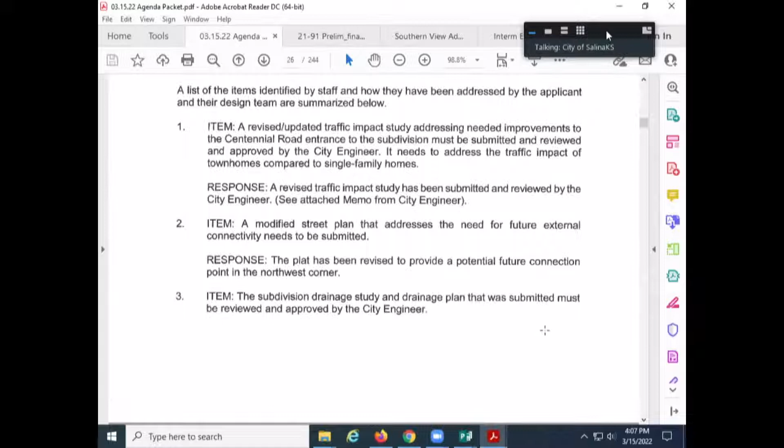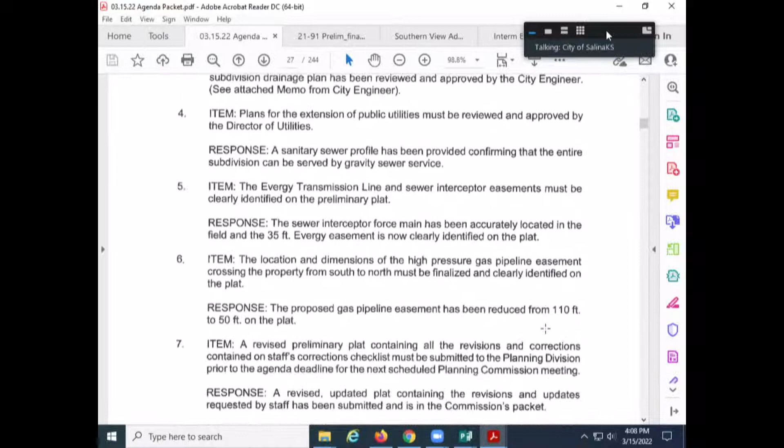We asked for and got a revision to the drainage study and drainage plan. An updated drainage study has been submitted, and the applicant's drainage plan has been reviewed and approved by the city engineer. There's a memo from the city engineer in your packet with the drainage study.

We wanted to make sure that plans for the extension of public utilities had been reviewed and approved by the Director of Utilities. The concern is that the sewer service for the entire subdivision is in the far southeast corner of the property, where Mr. Hers is showing his cursor. We wanted to confirm that the property could be served by gravity sewer service without the need for a pump station, and that has been confirmed.

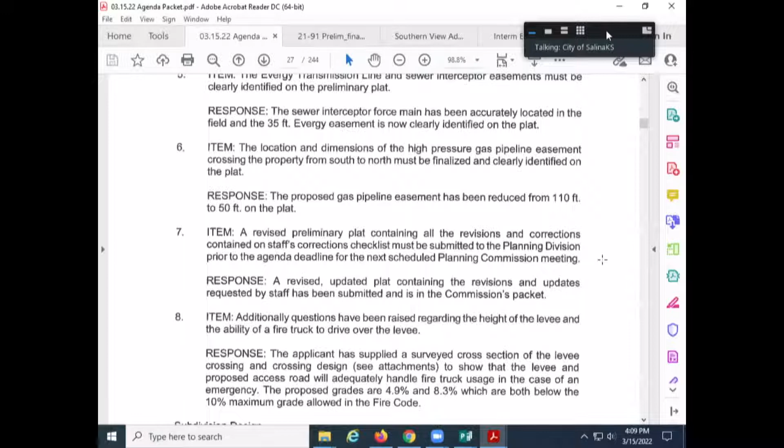We wanted to make sure the Evergy transmission line that crosses the property from south to north and the sewer interceptor easements were clearly identified, and we wanted the location and dimensions of the high-pressure gas line finalized. On the plat in your packet today, that gas line easement is 50 feet in width, located between Tim Rogers Lane and Amelia Lane, running south to north across the property. There's also a 50-foot easement for that pipeline in the Wheat Ridge Addition to the south.

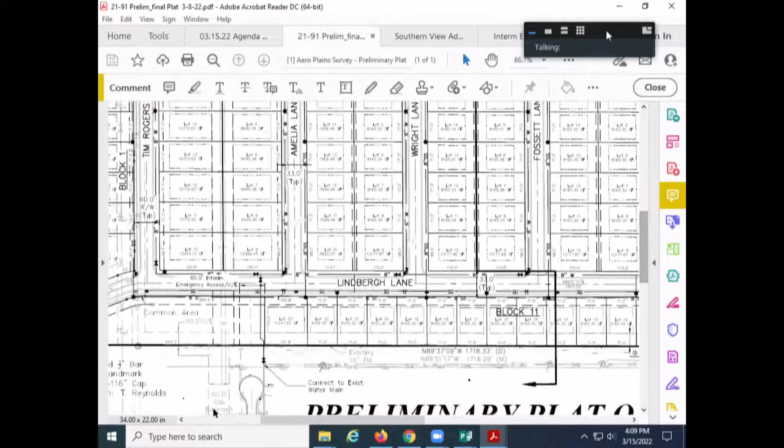We also received a revised drawing that had all of the labeling, lot and block numbering, and all the items we had requested.

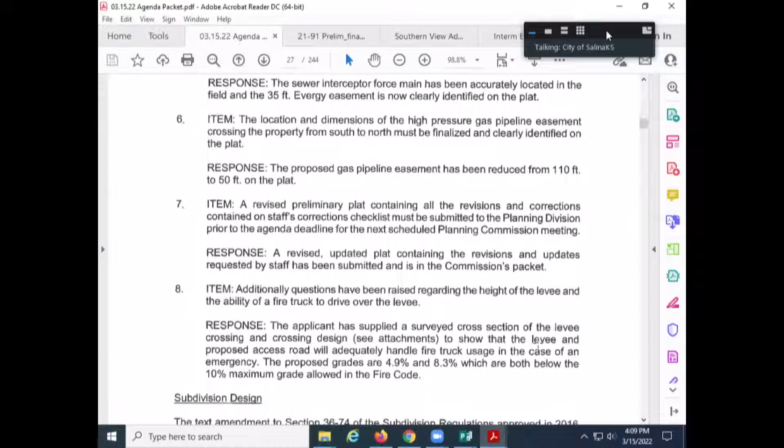Additionally, at the March 1st meeting, there was a question raised regarding the actual height of the levee and the ability of a fire truck to drive over it. The applicant has supplied a surveyed cross-section of the levee and a crossing design to show that the levee and proposed access road will adequately handle fire truck usage in an emergency. That has been included in your packet.

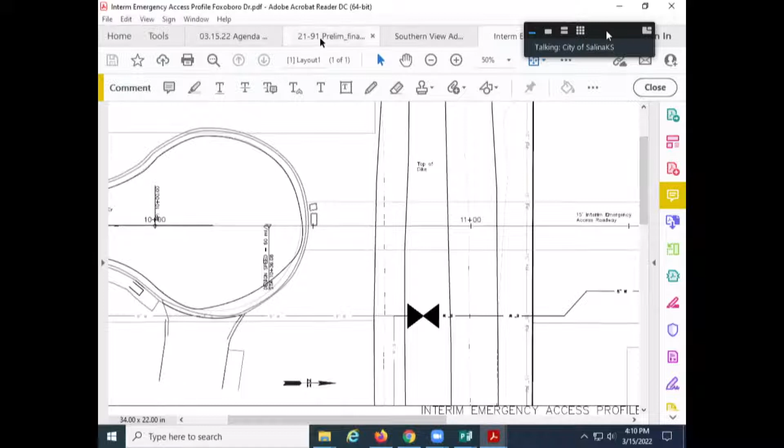The subdivision regulations, as amended in 2016, require that all new subdivisions have at least one public street access point onto what's referred to as a direct access perimeter street. In this case, Centennial Road is that direct access perimeter street, and there will be a direct street connection from this subdivision to Centennial Road.

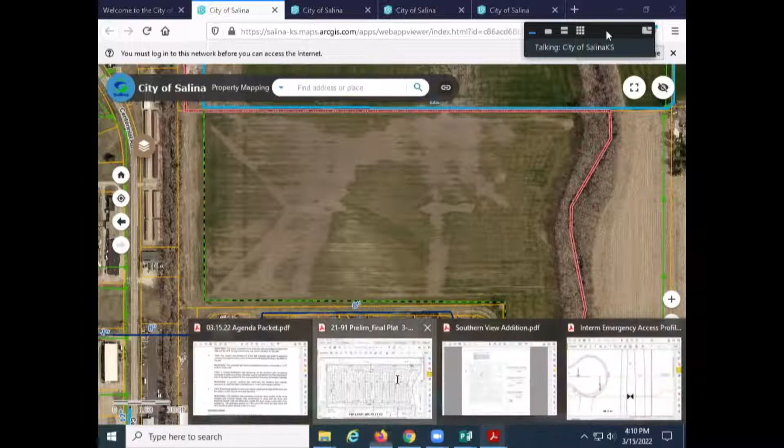It also advises that the new subdivision shall have any additional means of access in and out, either by direct street connection or indirectly to streets and adjoining subdivisions, as necessary for the Planning Commission to assure safe and convenient movement of traffic within the subdivision and between adjoining subdivisions, safe and convenient movement of traffic to and from the subdivision, and access for fire and other public safety vehicles.

One of the challenges we started with is that this property is essentially landlocked, with no frontage on or access to a perimeter street. It's historically been cultivated farm ground. To address this, Storage Mart obtained the right of access across property owned by the Salina Airport Authority so they can directly access Centennial Road.

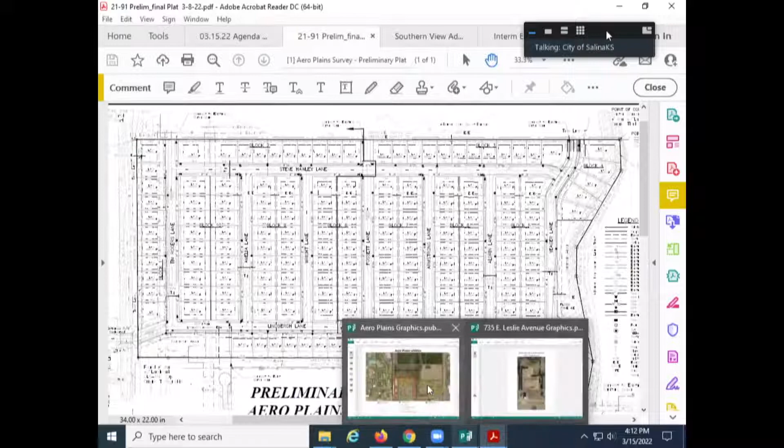To supplement that and provide a second means of emergency access as required by the fire code, they're proposing to construct an emergency access road from the north end of Foxborough Drive across the levee and into the subdivision. In addition, as you can see on the north, there will be platted street connections allowing for future connections either to an extension of Virginia Drive to the east or across the property to the north to Magnolia. There's a further option, shown on a map, that also shows potential to connect back to Centennial Road from the northwest corner.

The other thing we wanted to point out regarding the design challenges the applicants and their design team had to work around: you start with a property bordered by stream channels and a levee. You have an abandoned rail right-of-way occupying the west 100 feet, and because that was a rail right-of-way, you have an Evergy transmission line and a sewer interceptor line, plus a gas pipeline easement crossing the property from south to north, located in the rear of the lots between Amelia Lane and Tim Rogers Lane.

As far as the street access and particular design, Centennial Road is an arterial street. As constructed, it meets city street standards for width, pavement design, and curb and gutter. It currently carries, per the most recent count from 2020, 4,380 vehicles a day between Schilling and Magnolia.

There are 3 possible future street connections. One would be tying Tim Rogers Lane back to Centennial Road. A second would be Fossett Lane connecting to Magnolia, and then Yeager Lane going north and possibly east over to Virginia Drive. We have a plat design that allows for these extensions, but the timing of when those adjoining properties will develop is not within anyone's control.

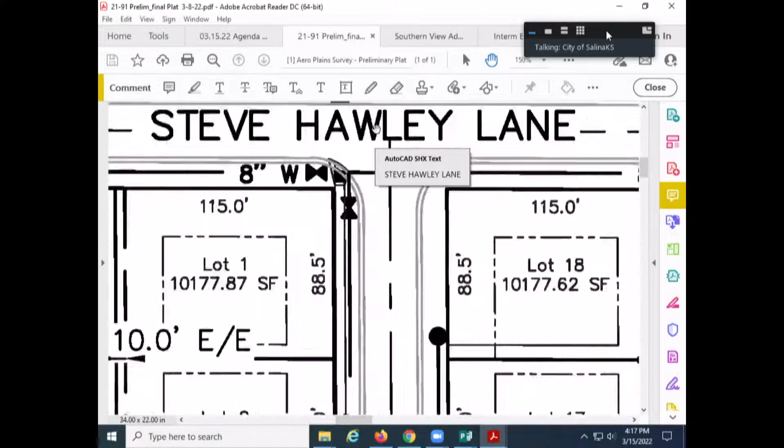We've highlighted the proposed street names on page 6 of your report. The original concept was to have Rogers Lane and Hawley Lane, and first names were added to avoid conflicting with existing Rogers Court and Holly Lane - even though spelled differently, if called in on 911 it would sound the same. So that's been changed to Steve Hawley Lane. As we've reviewed this, it may end up that Armstrong Lane would need to be changed too, to avoid 911 conflicts, because there's already an Armstrong Road in the county.

So we've looked at the layout. There are 169 lots divided amongst 11 individual blocks. There's a drainage easement detention area set up in the southeast corner to handle stormwater runoff, and there are 2 areas set aside as common open space.

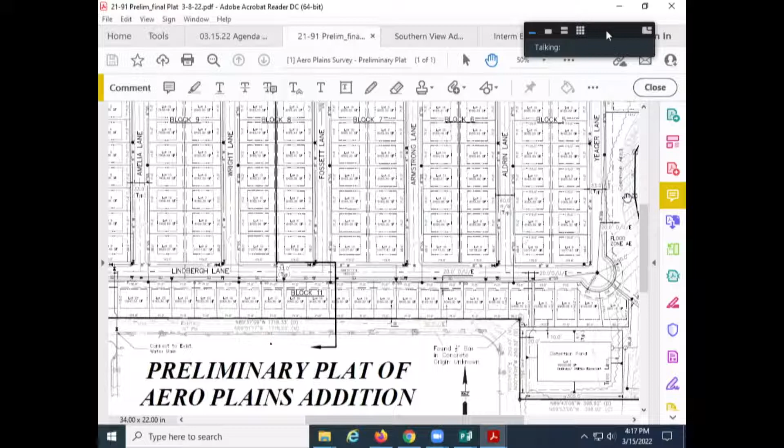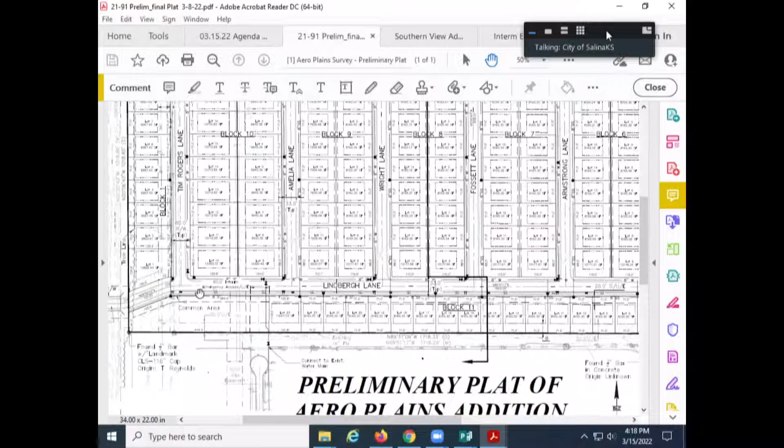So you have an open space over here, and the applicant can confirm that, but we believe the open space common area as you enter here would be an area for community mailboxes. Planning commissioners may or may not be aware that the U.S. Post Office has made a change to how they do mail delivery - they no longer let individual dwellings put mailboxes out at the street. They require in new subdivision developments that there be a compound with community mailboxes, and depending on the space, you can have 3 or 4 community mailboxes within a subdivision, or a community box for the entire development. The applicants will have to work that out with the post office, but conceptually this area might be a suitable spot for people entering the subdivision to stop and pick up mail. So they can confirm how they plan to use that.

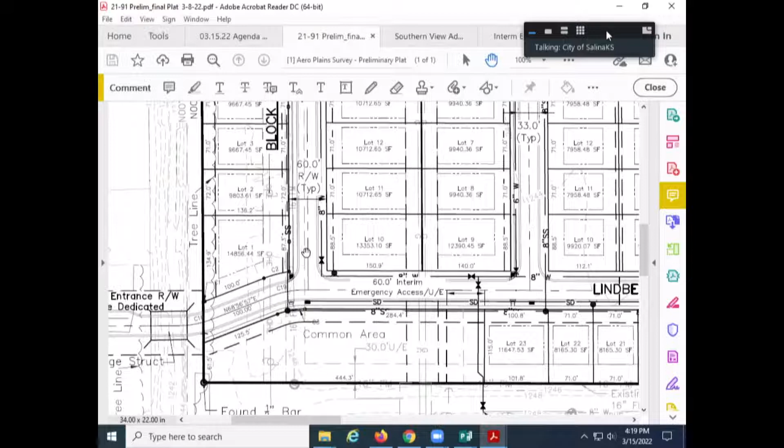One thing we wanted to point out is that these townhomes would have a higher than minimum setback, because we have the Evergy easement that goes through there, and they would need to keep the building setback of the townhomes outside of that easement.

In terms of utilities for this proposed subdivision, the water situation is quite good. As part of the Menards project, the city installed a 12-inch water main that runs down the west side of Virginia Drive and extends along the north boundary of this subdivision. That's a 12-inch line and provides good volume and fire flows.

To supplement that, the applicant's design engineer is proposing to connect to the line that exists in Foxborough Drive. That's a 6-inch line, but it would provide 2 sources of flow in case of an emergency.

One thing we wanted to point out is that there was a benefit fee assessed to this property. The calculated benefit for the water line improvement is $115,371.

There were also sewer lines installed as part of that Menards project, but none of those sewer lines directly benefited this property, so this property doesn't have a benefit fee for sewer.

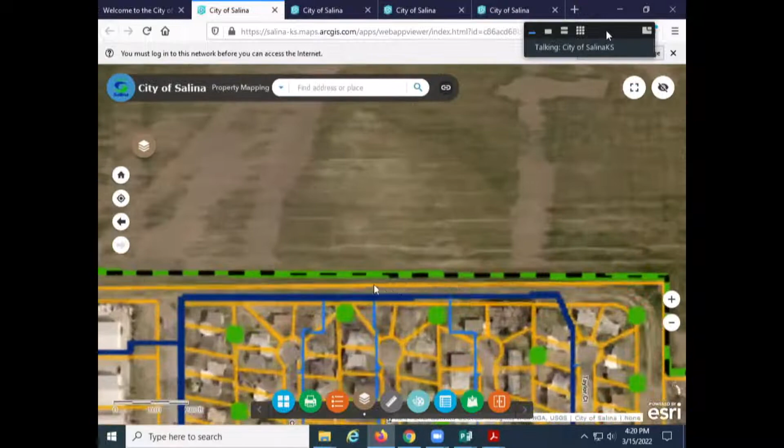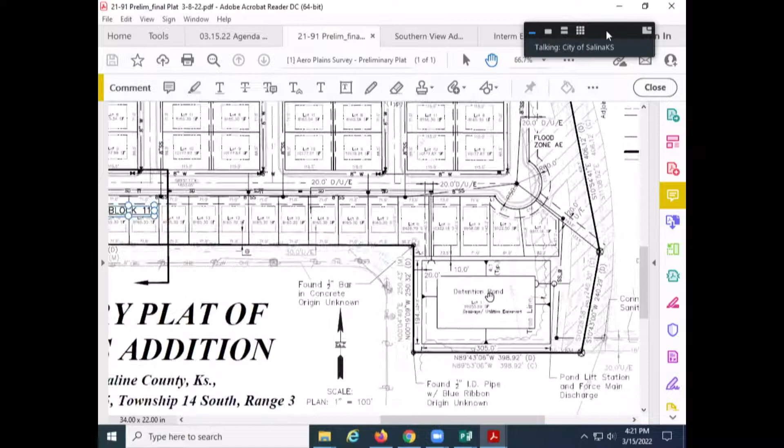The plan is to construct a detention pond in the southeast corner, in the range of 9 feet deep with freeboard. A pump would be installed, and water would be detained and then pumped into Dry Creek at a controlled rate.

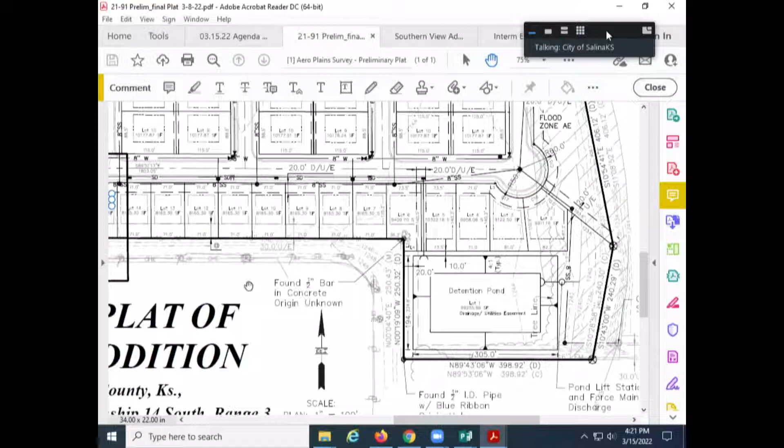Development of this property would be served by the Salina Fire Department because it's inside the city limits. The emergency response would be from station number 3 on Belmont, and this property is contiguous to areas that are within the city limits and already receiving city police and fire protection.

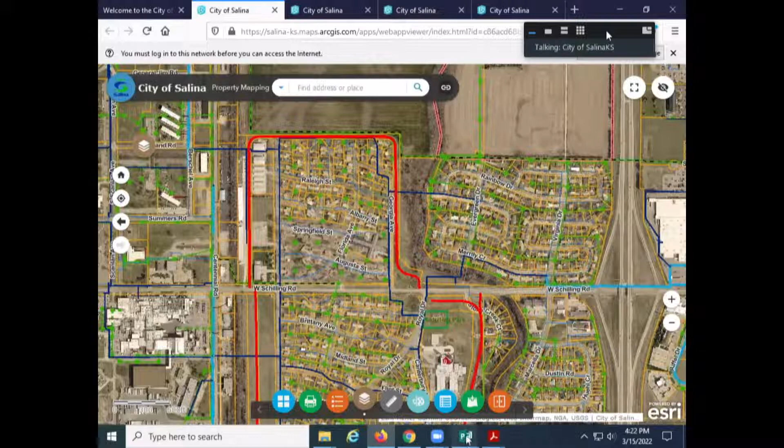As far as school boundaries, this is in the Schilling Elementary, South Middle, and South High School enrollment areas. We've been in dialogue with USD 305. They've indicated this is not going to be an area with any busing involved, so their identified safe route to school would be for children from this subdivision to go down Foxborough Drive, where there's already a built sidewalk on the north side of Schilling Road that connects to a crossing at Georgia, and then a signalized crossing at Royal Drive and Schilling Road.

So that would be the route both for getting to school, and then there's a small city-owned and operated pocket park north of Schilling Elementary that would serve as a play area or playground for this area.

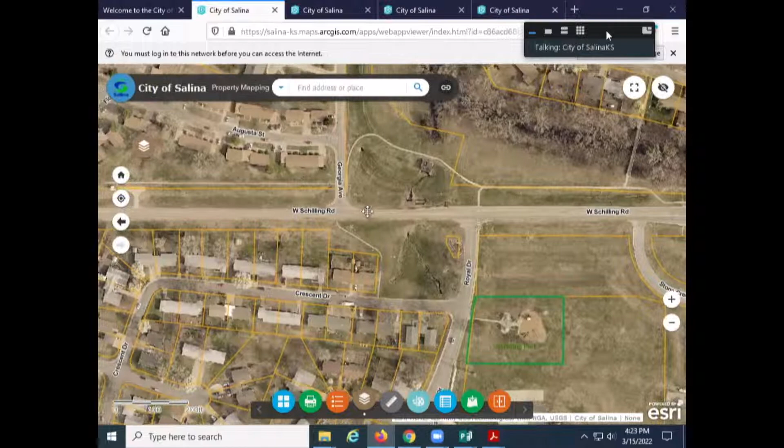That's really more of a pocket park and not a full neighborhood park, so there's no neighborhood park directly in this area. But development on this property would be subject to a park service fee collected at building permits, and those funds would go towards acquiring park land or enhancing existing park facilities.

This is in the Evergy service territory. Evergy plans to bring electricity from the west and the south to serve this subdivision. Just like our water department, Evergy likes to loop their lines and have 2 sources of electricity, so they would bring electricity in from Centennial and from the south from Foxborough.

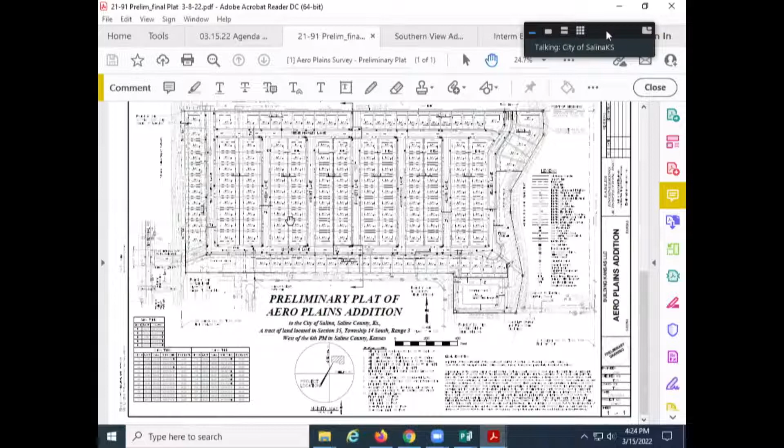All electric lines in this subdivision would have to be placed underground. The original proposal from Evergy was that they wanted to put their lines out front, and then we discussed that with the developer. They went back and spoke with Evergy, and we believe Evergy has now changed their minds and are now planning to serve individual lots from the rear easements, which makes a lot of sense in a layout like this—it's a lot more efficient, since you can serve 2 sets of lots from a single line by running it up the common rear lot line. So that's the plan for now, and there are also natural gas facilities available.

A traffic study was done; it's in your packets. Centennial Road was improved as part of a KDOT project in 1995. The traffic study indicated that if you had 338 townhome units fully built out, that would add 2,448 vehicle trips to the existing daily traffic counts on Centennial, or about a 55% increase for that stretch of roadway.

The conclusion was the current 2-lane roadway has the capacity to handle that additional traffic, with the exception of a recommendation for the only geometric improvement being a left turn lane for southbound traffic on Centennial.

We've had discussions with the applicants and their design team, and there is sufficient right-of-way, and at this point they plan to construct a 3-lane intersection at Centennial so that they would have a right turn lane, a left turn lane, and an entrance lane on the connection to Centennial, so there would be both dedicated right and left turn lanes for traffic exiting the subdivision.

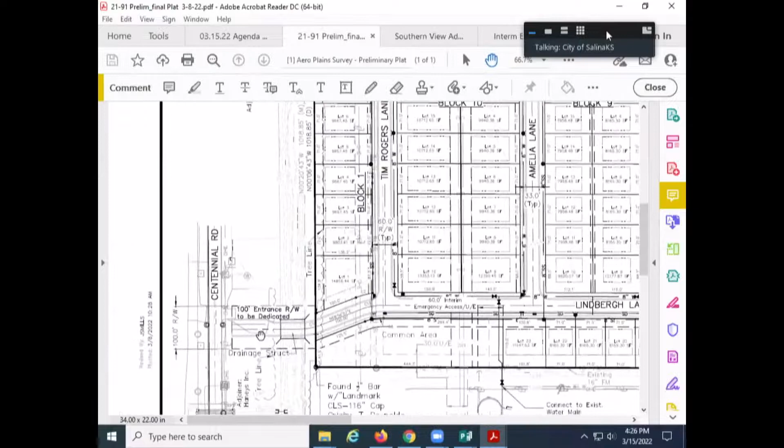City engineer has reviewed the traffic study and provided a memo that's in your packet, and has agreed that the only improvement needed to support this development would be the added left turn lane.

We have all the easements needed, both utility and drainage, shown on the plat. All of the streets would be in dedicated public right-of-way and accepted for city maintenance. The applicants have indicated at this time that their preferred option would be to pay a maintenance fee to the city and to deed the pond over to the city for city maintenance. We have a process for that.

So if we look at all the public improvements, that would be the responsibility of Aero Plains. There's about 9,300 lineal feet of internal streets, plus the 210-foot connection out to Centennial Road, plus they would be responsible for constructing the left turn lane on Centennial Road as an off-site improvement.

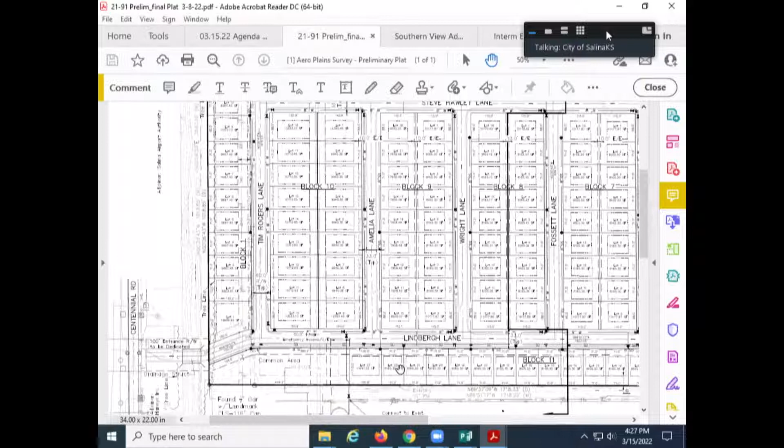They would be constructing sidewalks on both sides of all the internal streets. They would also be responsible for extending sidewalks on the section of Lindbergh Lane out to Centennial Road, and for designing a pedestrian path for school children and others, either as part of or next to the fire access road to connect to Foxborough Drive.

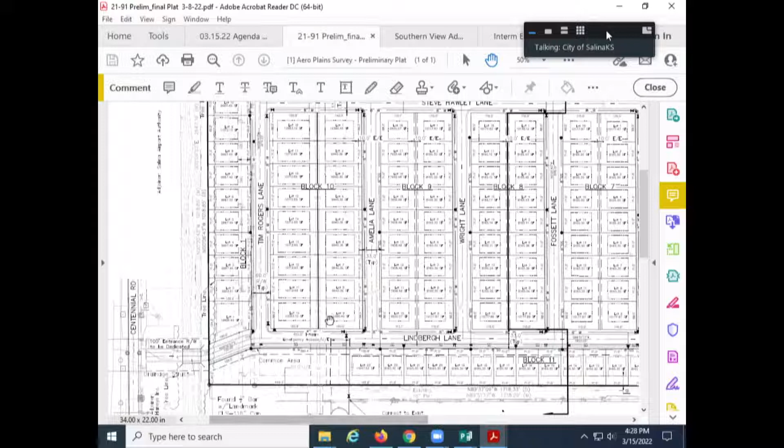They would be responsible for final design and construction of the detention pond and any storm inlets or pipelines needed to get water there. They would be responsible for design and construction of all internal public water mains and public sewer lines. So those would be amongst the improvements.

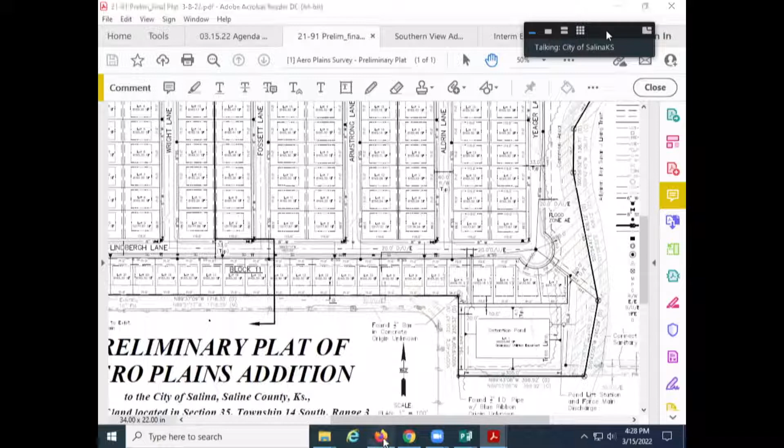Then in terms of impact fees payable to the city, there would be a payment of the benefit fee for the 12-inch water line, and then payment of the pond maintenance fee if applicable, and then park impact fees which would be collected at the building permit stage.

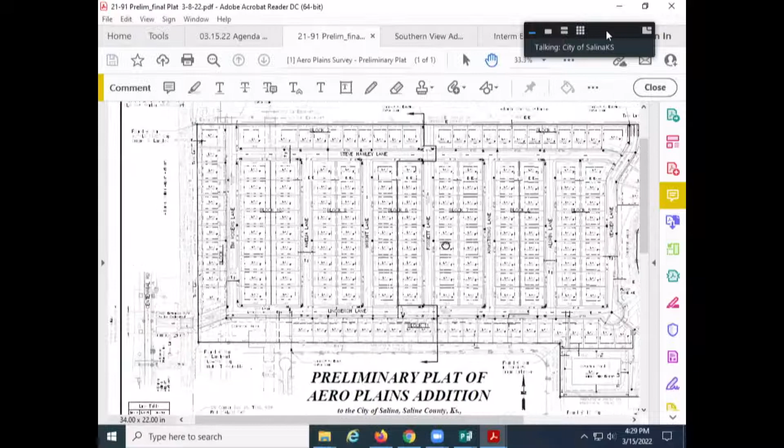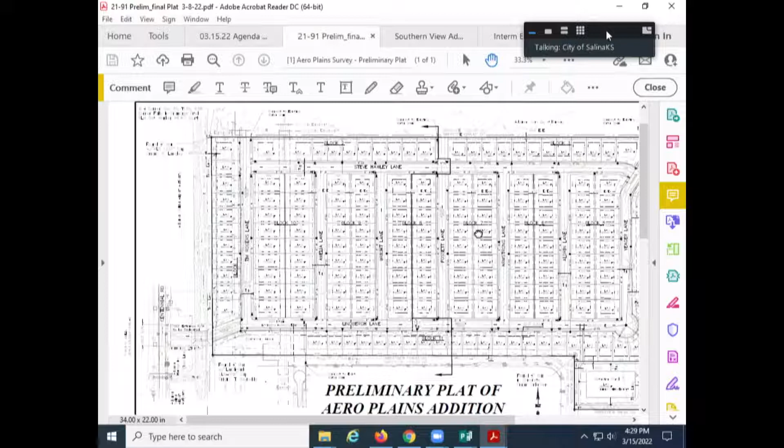So there is a conceptual or preliminary phasing plan, and that phasing plan would involve 75 lots east of the line shown on that drawing, and that would also involve construction of the interim emergency access road. That emergency access road, as we noted, works for phase 1 but does not work for full build out of the subdivision. The second phase would be construction on the 94 lots east of Wright Lane, and that would require a second public street connection in order for that to move forward.

In terms of financing, they're not seeking special assessment financing, but are planning to use RHID financing to help fund the public infrastructure for this development.

It's not clear at this time whether there will be covenants and an architectural review committee for the townhomes. We would clarify that with the applicant on the final plat. At this time, there's an indication that a homeowners association would maintain those green spaces or common areas shown on the plat.

Our future land use map for the city shows this as appropriate for suburban residential development, which has a density range of 4 to 8 units per acre, and the density here would be 6.35 housing units per acre, which is right in the mid-range of that density range.

And our plan says that new growth should occur in a contiguous manner adjacent to existing development supported by public infrastructure. In staff's opinion, this subdivision is being done in a contiguous manner adjacent to existing development and is supported by public infrastructure.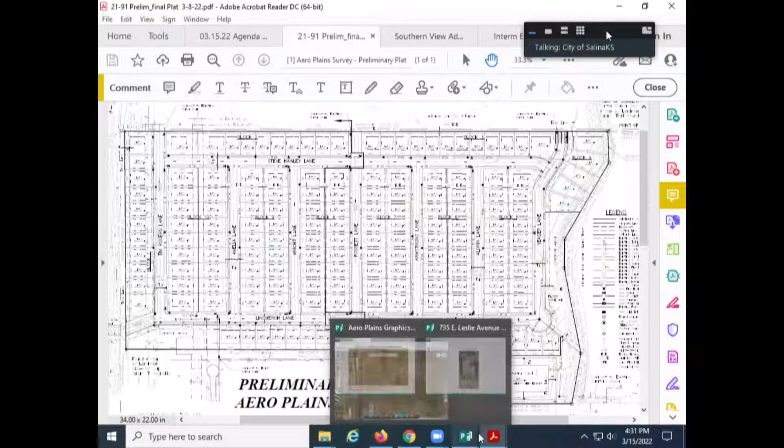In terms of connectivity, as we noted, Centennial Road's an arterial street. If there is a future connection to Virginia Drive, it's classified as a collector street, and the master plan is for Virginia Drive to extend from Magnolia to Schilling.

School children can reach Schilling Elementary via Foxborough Drive and a sidewalk on the north side of Schilling Road. As we noted, there would be no busing of students from this subdivision to Schilling Elementary.

So we have laid out on page 11 a summary of possible findings in support of approving this preliminary plat for Aero Plains Addition. And then on page 12...

If you concur with our finding that Centennial Road is a direct access perimeter street, and you believe that the review criteria for preliminary plats have been met by this application, and you wish to approve this preliminary plat application, our recommendation would be that approval be subject to the 9 conditions that we've outlined on page 13 of your report.

Number 1 is that the applicant would be responsible for all public improvements shown on the preliminary plat and preliminary infrastructure drawings, including any improvements to Centennial Road determined to be required by the traffic impact study. That would mean the southbound turn lane on Centennial would be the responsibility of this development, and those improvements would all have to be made before any building permits are issued for phase 1.

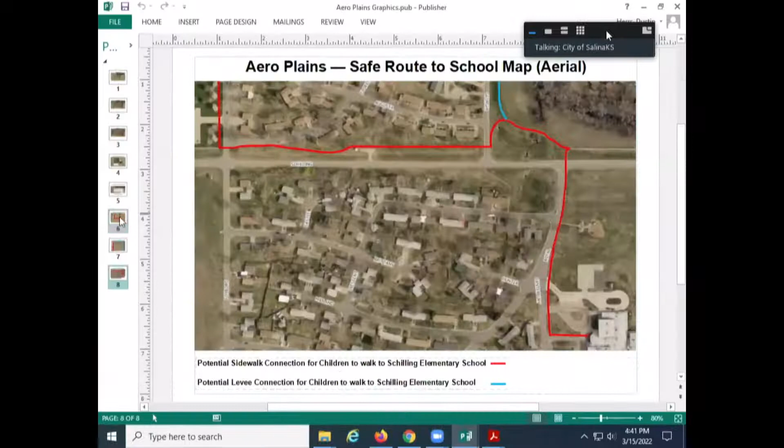Okay. And then as the fire marshal has characterized the Foxborough as an interim emergency access, because it only works for Phase 1. The other aspect of that is if there is a second street connection made up here to Virginia Drive, then this emergency access becomes unnecessary, and it could just be removed or come out. It's there on an interim basis and makes Phase 1 work, but it does not make the entire subdivision work.

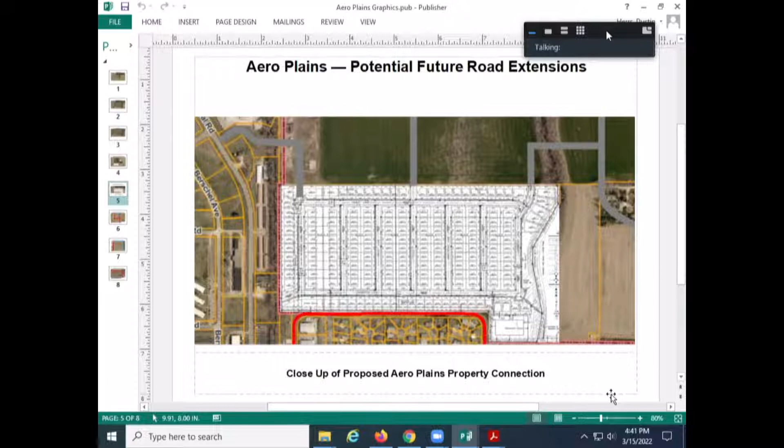But just to clarify, the access for the kids to get to school would stay permanent, though, right? Yes, there's a dedicated easement for that. So even if the fire road came out, there would be a pathway for children.

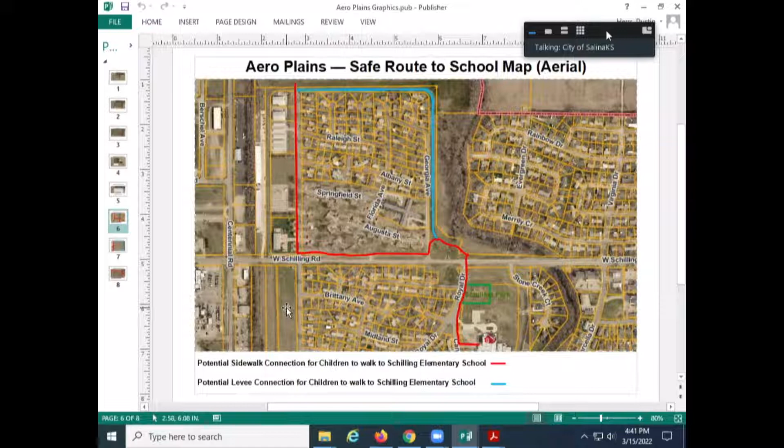And like I said, I don't know which direction it'll go, but there is a possibility that if that is not viewed as providing a needed or identified level of flood protection that has to remain in place, then the crossing there could basically be brought down to grade level, which would facilitate both pedestrian and vehicle access.

Anybody else got any more questions for staff? Would the applicant like to add anything before we move on?

Good afternoon. I would just like to say thank you for taking the time to look at this with us, and see if you have any questions for us.

Have you had a chance to look at the 9 recommendations, and are you on board with those? Yes, we are, and yes, we have. Okay, thank you. All right, thank you.

Okay, anybody from the public like to comment on this?

Good afternoon, Chairman Hay. Good afternoon, Commissioners. My name is John Blanchard. I'm not only a resident of Salina, Kansas, but I am a landscape architect and land planner. I've been following your 2 prior meetings prior to this, so I won't go over some of the good quality questions that you guys had asked before. I would say at the outset, I'm not opposed to this development at all. I just think there are a number of things that need to be taken into consideration from a practical standpoint, and they generally fall into a number of categories. One is the emergency access that you folks have talked about quite a bit.

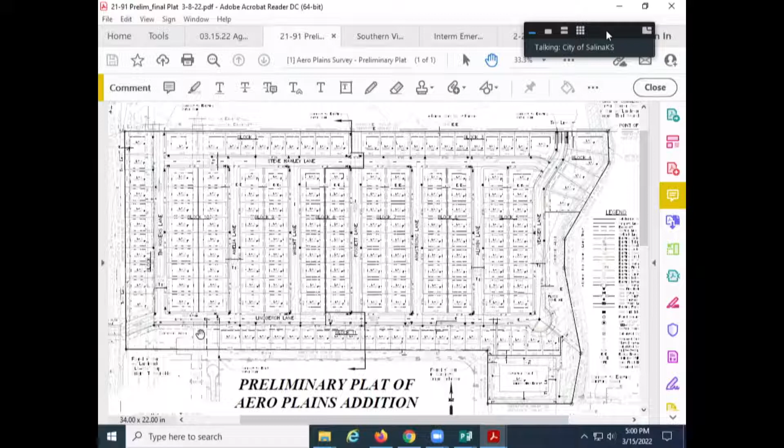At that point in time, it's only been designated as an emergency access. If we're going to turn it into a street, then we're going to have to redo this and let the public know, because it's no longer just emergency access, and it's going to change the traffic. If it's emergency access, we use it once a year or never in five years. If it's a street, it's going to be used daily.

I agree with that somewhat. I trust this engineering data from the traffic study, and I don't see an emergency evacuation being much different than 7:40 in the morning, people heading to work, or vice versa, coming home. But let me throw a hypothetical out there. Say there was an emergency that affected people. Would you not coordinate with the police department and look at the situation and say, okay, we need to open this up for people to evacuate?

I was actually on scene as one of the commanders at the incident Mr. Blanchard mentioned, when Tony's had the leak inside the building. We did choose to evacuate, but that wasn't necessarily because of the plume—a little, but it was as much because of the water system. This was going into our wastewater, and there's a channel that runs right to the west of this development, running all the way south. We actually had other city departments bring in dirt and a front loader to dam that up so it didn't get any further.

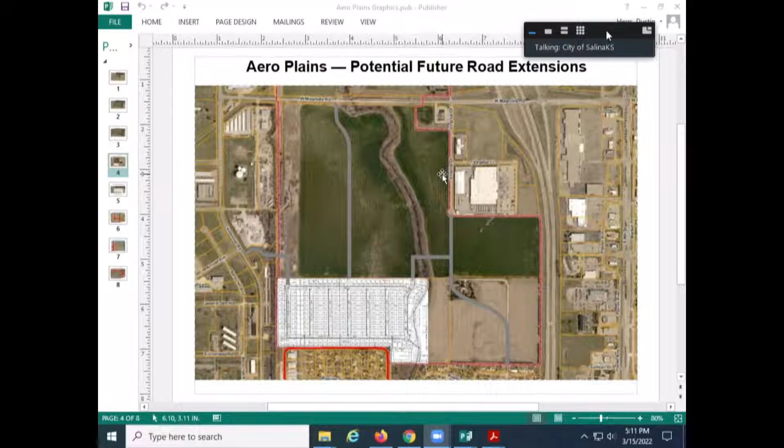But we have areas in Salina right now that have one access point. There's a community off of Marymount Road up by, it used to be the Elks, the Great Life, that has one access point in and out for the entire community. If there's an emergency, everyone is coming in and out of one access point. Off of Iron Street, there's another community by the dike that comes in and out with one access point. So it's not a new concept.

When you have your emergency services coming back in and looking at the total volume, that's why there's a Phase 1 and Phase 2, to be able to get in and out of that access point. And I agree that once you do Phase 2, you're going to have another point there.

They may never be able to do Phase 2 if the other parts aren't developed and a road doesn't go into it. But at this point, Phase 1, at least from a traffic study standpoint, with our fire chief, fire marshal, and safety considerations for in and out access, we have safe areas for them to get in and out. We have 2 access points. Yes, they're close, but it gives you 2 points. That entire street system loops around, so if one area is blocked off, you can go another direction and still get in and out.

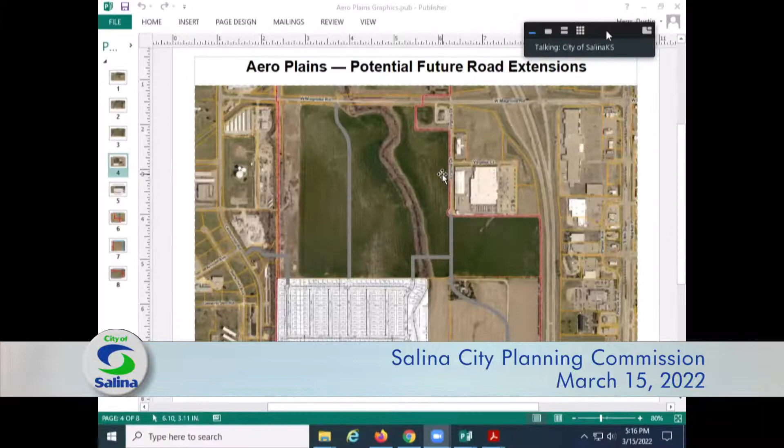There's going to be construction equipment in the streets in Phase 1 while they're trying to move residents in there. And who says Phase 1's going to be fully built before you start having people move in? You'll build Phase 1, and once Phase 1 is completed, then you start selling those lots and having people move in. They'll have all the streets 100% complete before anybody starts building houses — that makes a difference. And Phase 2 technically can't get started until they have the other access points, or they have to actually build those streets to be able to go back in and build the rest of it, because they can't build the lots and put the houses on there until the streets are built.

Mr. Mike, so in answer to your earlier question, Mr. Herrs and I have done the math. One of the things the traffic study did not do was break it down into Phase 1 and Phase 2. If Phase 1 is developed, it will increase the number of vehicles per day on Centennial by 1,086 additional vehicles per day, over a 24-hour period, as opposed to the 2,448 number, which is for full build-out. For Phase 1, that's an additional 1,086 vehicles a day, a 25% increase over existing traffic, as opposed to a 55% increase at full build-out. So the report says 2,448 additional vehicle trips per day at 100% build-out, while the number for Phase 1 is 1,086 vehicles per day, a 25% increase in traffic compared to 55% at full build-out. Thank you.

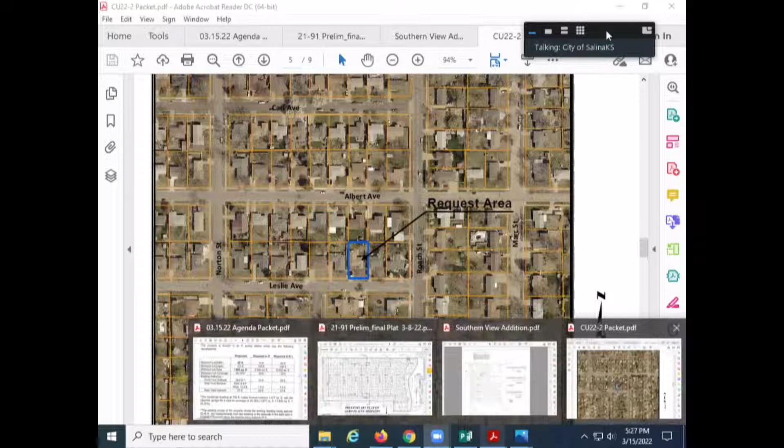Something interesting and unique about this property is that it's part of the Southern View Addition, which was platted in 1955, and the dimensions of the lots — we are in block 10. Leslie, even though it shows Albert on the plat, is actually Leslie, and it spans blocks 9 and 10. We're looking specifically at lot 12. These interior lots are all 65 feet by 120 feet deep. The corner lots are more — 77 and a half and 78 feet wide. So the interior is 65 by 120.

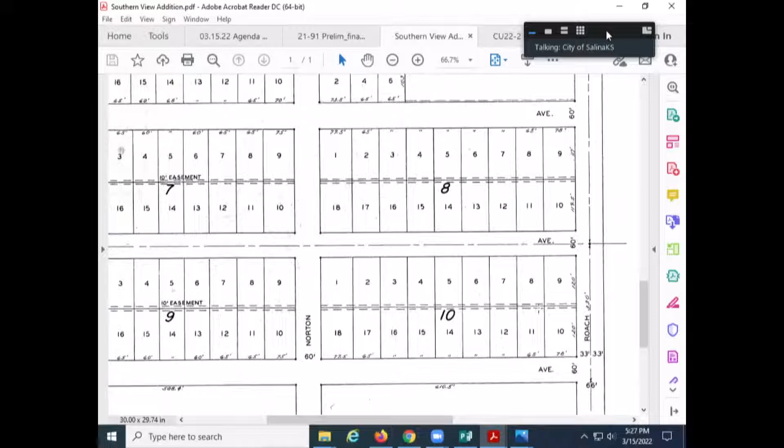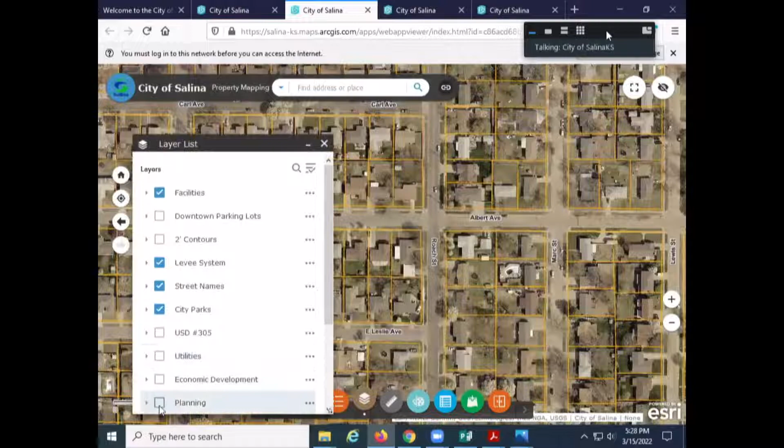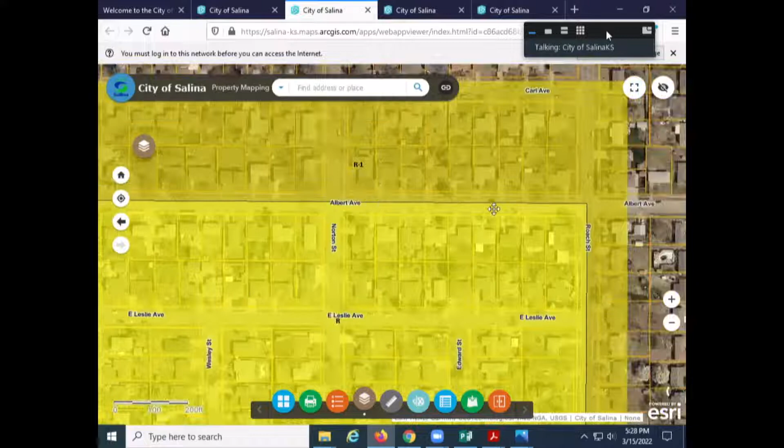The reason that's particularly interesting is when you look at the zoning district of the property along Leslie, blocks 9 and 10 are all single family. That zoning district has a lower density requirement than what you typically see for R1, which is what you have in the surrounding area. We'll show you what that requirement looks like.

There's a table in your packet on page 3 you can look at, but it's also on the screen here. I broke down the existing conditions of the applicant's property in relation to the required R and R1. The plat itself was platted in 1955. The house was built in 1958. There was an addition to the rear. I'm going to get the arrow up again.

A 22 by 24 living room addition was constructed in 1971, and then in 1977, the city of Salina had a comprehensive rezoning, which changed the zoning district for these properties to R, the existing current zoning district we have today.

That zoning district has different requirements than what you typically see in R1. The width of the site, as shown on the plat, is 65 by 120. The R minimum requirement is 70 feet, and the overall minimum lot area is 8,500. The platted lot of record is 7,800.

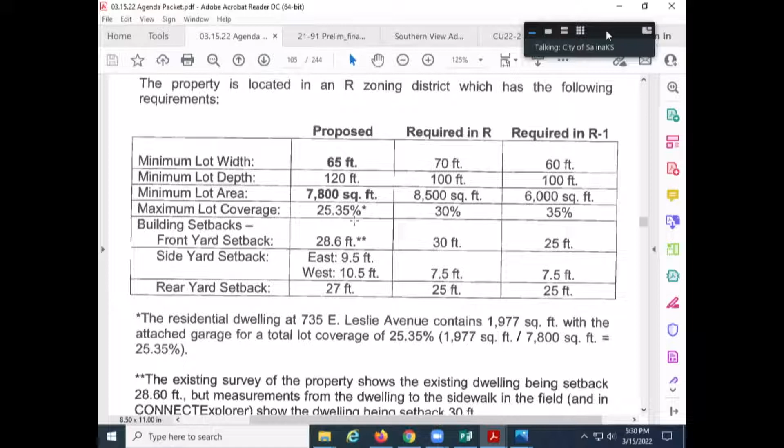So it's pre-existing non-conforming as to lot width and lot area. Because it is a legally established lot of record, designed and built under the standards before it was rezoned to R, it's a legally non-conforming property. That doesn't disqualify it from a conditional use, but it does mean you may want to consider whether this lot is wide enough and large enough for a group daycare home.

Looking at welfare of the public and convenience, the applicant believes the proposed daycare will benefit the public because it'll add additional care for families in the neighborhood and within the Salina community.

Staff would note that we did a site visit consisting of the Saline County Health Department, our local fire department, our building services division that looks at building codes, and planning. During that inspection, the only items not in full compliance were minor things like coverings of electrical outlets and fire smoke detectors being added. Those are minor items that can be addressed by the applicant as we go through the process, but other than that, the site met all requirements for all those entities.

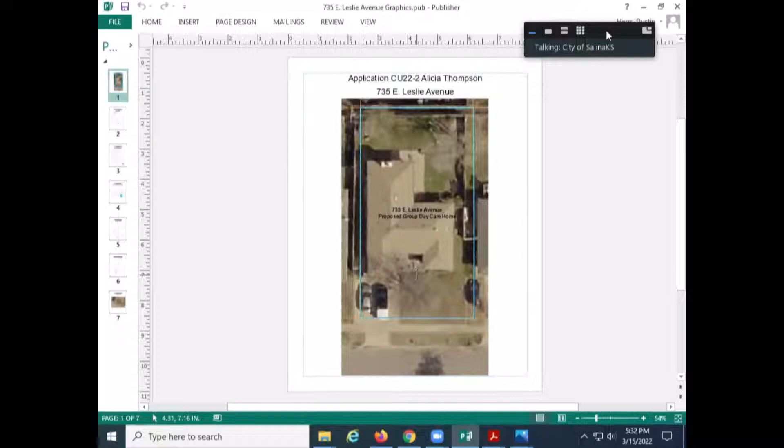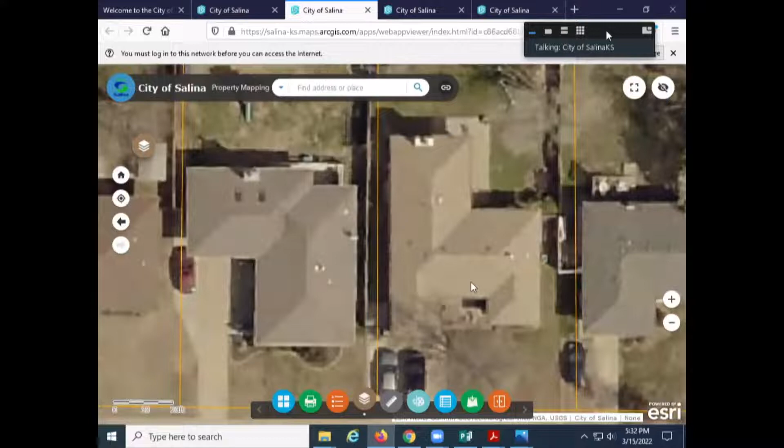Looking at the surrounding properties and whether the proposed conditional use would cause injury to them, the applicant states there are no physical changes proposed to the site. It will remain unchanged to someone walking by, with no changes to the outside of the facility. Typically we have an established licensed daycare for these applications, but this one is unique because the applicant just recently moved to this location, so she hasn't operated a daycare here before. We're going from what was previously just a single-family home to a single-family home that's also going to have an accessory use of a group daycare, which is something to consider.

The backyard is fully enclosed with a solid wood fence. We have some pictures here to show what the property looks like. This is the front, looking at it from Leslie. It's got a 26-foot wide driveway, so you can park two cars in it easily, plus an attached garage for a third vehicle, an off-street parking stall. Here's another view of the backyard, fully enclosed with a solid fence.

Staff would note that we received an email with concerns in opposition to the proposed conditional use permit, from a neighbor directly to the east. Her primary concerns are two major things: increased traffic with children being dropped off and picked up, and noise, and that those two items could impact the resale value of her property. Staff would note that the vast majority of daycares in Salina are licensed daycares or group daycare homes such as this, located in residential areas. I know you're aware of that since we bring these to you fairly often, but it's something to keep in mind and consider.

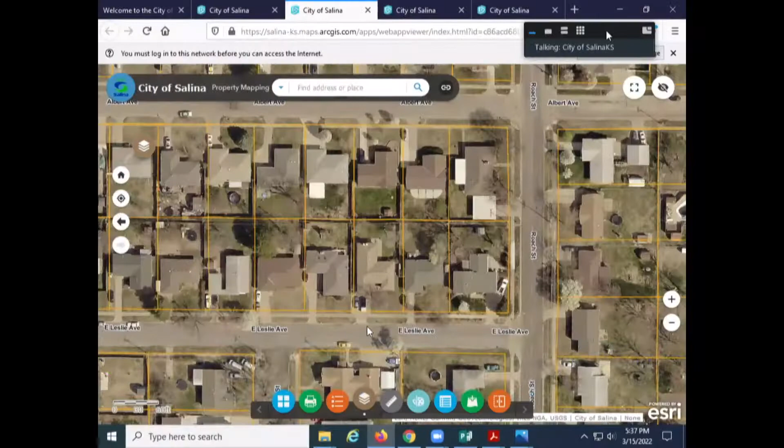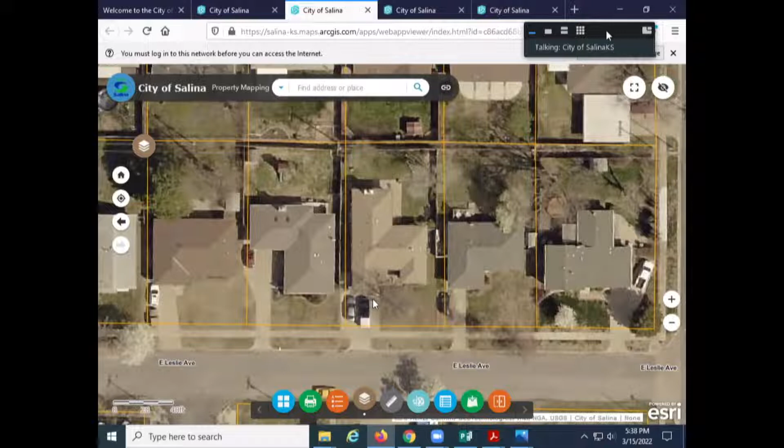Off-street access and off-street parking. The driveway itself is 26 feet wide, connected to Leslie, and there are 3 parking stalls, 2 in the driveway, 1 in the garage. And so that does meet the minimum requirements. The zoning regulations require single-family residences to have 2 off-street parking spaces, and they also require additional parking space for the care provider. In this case, there are 3 vehicle spots, or 3 parking spaces.

The applicant has shared with us that her model, or the operation she envisions, is she would have a space in her garage for her vehicle, her husband would go to work, her care provider would come and use one of the 2 parking spaces in the driveway, leaving one open for drop-off and pickup. If multiple parents arrive at the same time, they could use the curb along Leslie Avenue, which is just a 2-block street, so there's not a lot of traffic on Leslie. In fact, because it's only 2 blocks, we don't actually have traffic counts for it because it's so low. I don't know what that means exactly, but it's probably 1,500 or less, maybe 1,000 cars a day or less, something along those lines for sure.

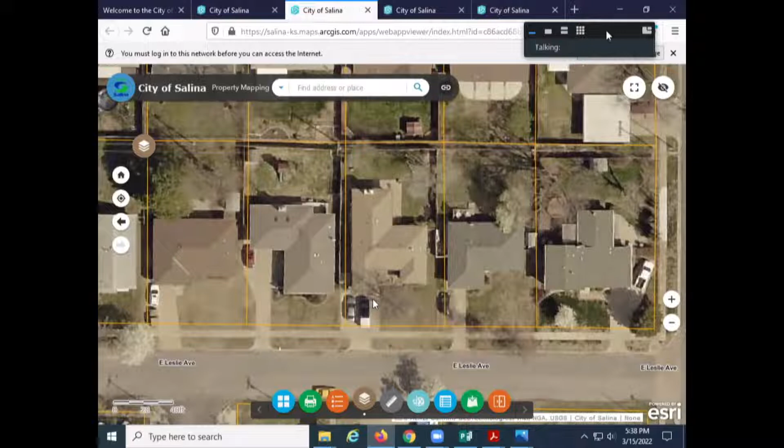Staff comments and analysis. As I noted, the Saline County Health Department did inspect the site, the fire department has, and our building services staff has, and it does meet all the regulations once the electrical outlets are child-proofed and the fire detection smoke alarms are installed.

And so with that, we do have some alternatives on page 7 that you could look at. The first is that you could approve the conditional use permit as it's requested. If you feel that all of the requirements of the conditional use permit have been met and satisfied, you could approve the application subject to any specific conditions or revisions made to the plan.

You could also postpone consideration if additional information is needed, or you could deny the application if you feel that it's not an appropriate site for a group daycare home and that it could possibly cause injury to the surrounding properties and the neighborhood around it.

In this case, we do have some findings of fact for you to consider on page 7 that summarize what we've talked about in our report. And we do have a condition that no more than 12 children may be cared for at any one time, in accordance with state standards for group daycare homes.

And then in the past, there have been some instances where you've tied the approval of the conditional use permit to the operations of the applicant. I don't have that listed here, but if that's something you would want to do here, we could add that, where if Ms.

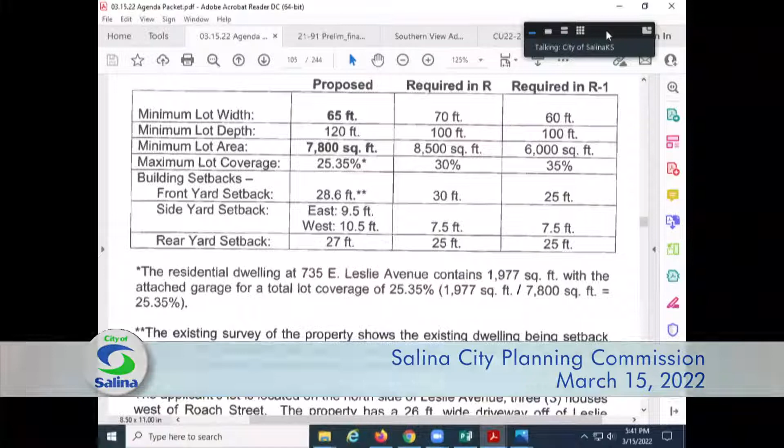That's one of the reasons I spent more time than usual talking about the requirements, because this site would meet the R1 conditions fairly easily. The R1 conditions have a 6,000 square foot minimum lot area requirement, a 60-foot lot width, and a 100-foot lot depth, and it would exceed all of those. R1 is our most prevalent residential district. When Mr. Andrew and I were looking at this, we were surprised that this is zoned R, because none of the lots conform except for the corner lots. I mean, they're completely non-conforming lots.

All of these lots are within this subdivision, so it's a little peculiar. It probably should be zoned R1, but it's not, it's zoned R. So the question then becomes, is it large enough to conducively operate a daycare without impacting the neighboring properties in a negative way?

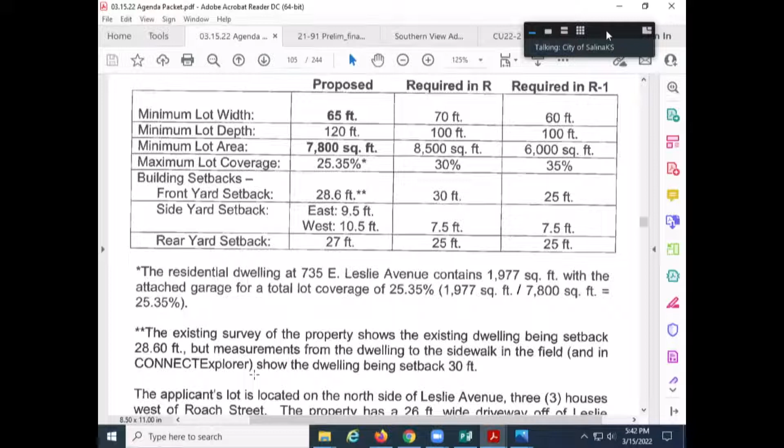Thank you. Can you go back to the photo from the backyard? Sure.

Let's see here, if I have a picture. I don't know that I have one. Let's see if we can get it from the aerial photo. I think there's, oh, right there. Is there a gate here? I'm not sure, you may speak to the applicant about that, my memory is already foggy. Yeah, there may be a gate here, or maybe there's a retaining wall, go ahead.

Step up, please. My name's Alicia, I'm the resident at 735 East Leslie Avenue. Our landlord is currently working with a contractor to get that fence reinstalled, because when the windstorm came up, it took that fence down. So he's currently working with a contractor to get that south fence put back up.

It was just this location where I've got my cursor, is that right? Okay, and then all the rest of the fence stayed up during that windstorm? Okay, yep. So quick question, you mentioned your landlord, so you're not the owner of the property? Correct. Okay, and then, have you had a daycare prior to coming to this property? I did not, I am in the process of getting the daycare licensing.

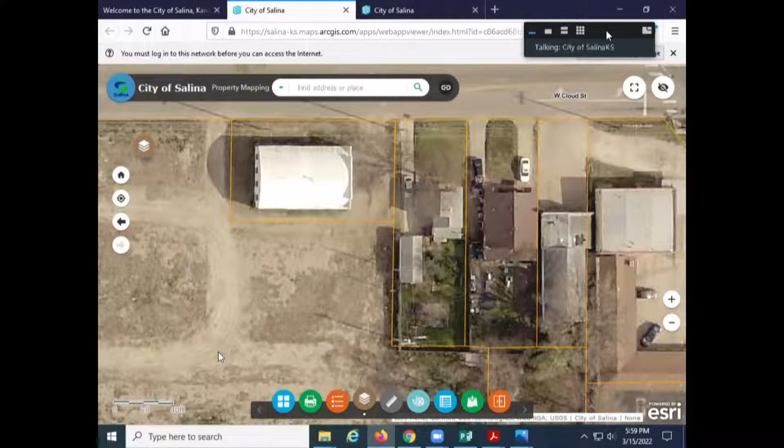One of those is the gym, which is a private weightlifting club. Another one is a rental home. And then this is an unusual building that's, through its history, mostly been used for automobile repair. We addressed that in more detail in our zoning report, but the parcel we're talking about does not include this—it goes around that boundary.

Okay, but we could do the urban residential designation and cover all of those properties. Yes. Okay.

When you're looking at land use plan designations, your lens should be from a higher altitude view and not looking just at an individual parcel. But there's a case to be made because those properties are all kind of related to each other from Haskett over to Broadway, and it's when you get west of Haskett that you're really back into lower density single family.

But it would be the commission's choice whether to change the designation at all, or to limit it just to the 2.64 acres we're looking at a zoning request for.

Is there any negative impact, Dean, to the other property owners in terms of the designation? Well, it's all a matter of perception. The land use designation is just laid on top of the already existing uses.

So you can see that the armory here has got an urban residential designation. Well, it's not a residential property, but the development characteristics of the property are closer to urban residential.

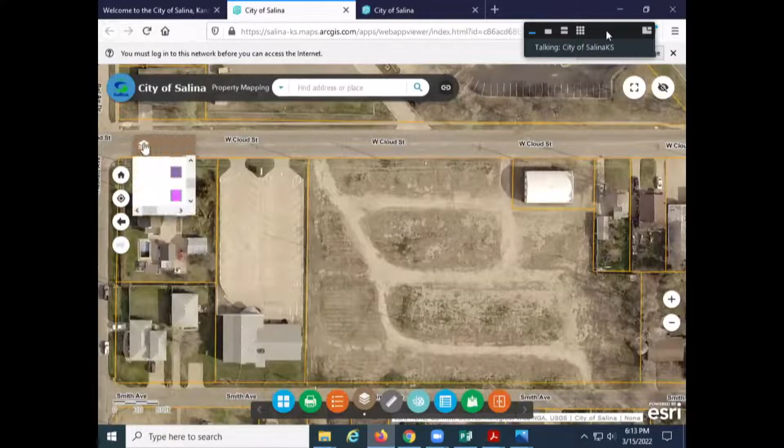We have a 6-inch water main in Cloud and in Smith, and those would be interconnected to provide for fire protection. If you went to the site plan, you'd see their proposal to add fire hydrants to the site, and essentially they would be running a connecting fire line between Cloud Street and Smith Street that would serve fire hydrants to provide fire protection.

There is no sewer in Cloud Street, so they would tie back into the sanitary sewer in Smith. There's no storm sewers in Cloud, and there is a storm sewer in Smith, but staff was contacted by concerned residents on Smith who are primarily concerned about not having the site runoff go to Smith. So the plan is to grade the site to drain to Cloud Street.

Then it would go west on Cloud to a large set of storm sewer inlets at Haskett and Cloud. From there, the storm sewers get progressively larger till they get to Tally Drive, which goes to the west, and there's a 60-inch box that carries storm sewer west all the way to Dry Creek, which crosses the interstate right at Cloud Street. So all the runoff from this site would end up going west and into Dry Creek.

The only other thing we'd note about Cloud Street is that it's unusual - it's an arterial street, but it only has 50 feet of right-of-way, so the south right-of-way line for Cloud is right behind the curb.

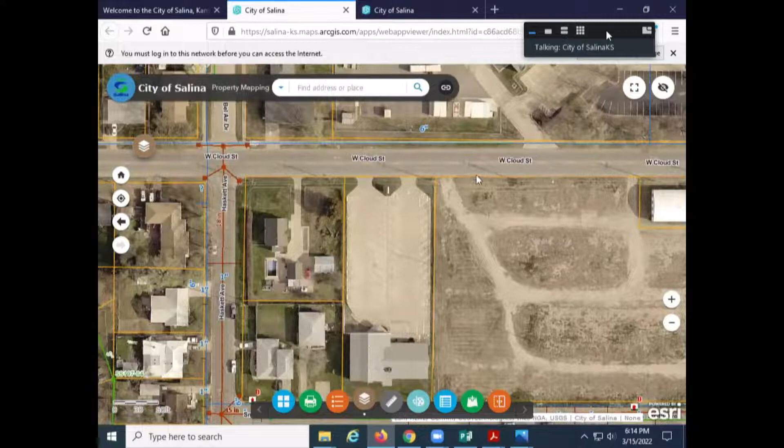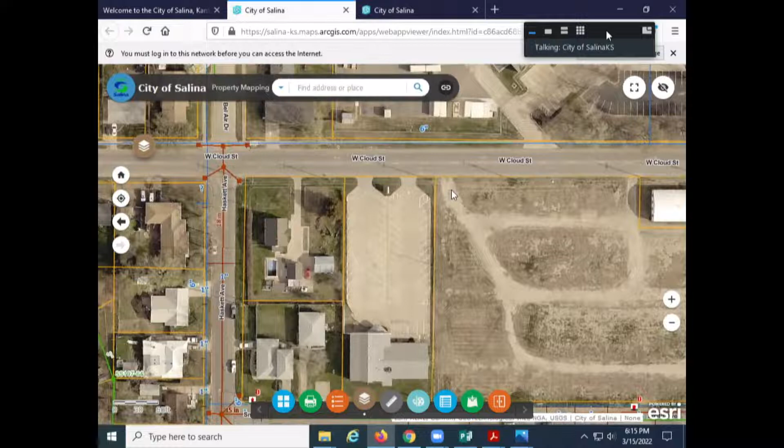Fire response for this site would be from station number 2 on South Santa Fe. This property is in the Schilling Elementary School, South Middle School, and Salina High School enrollment areas. I do believe this would probably be in the category of a site where busing would be provided to Schilling School.

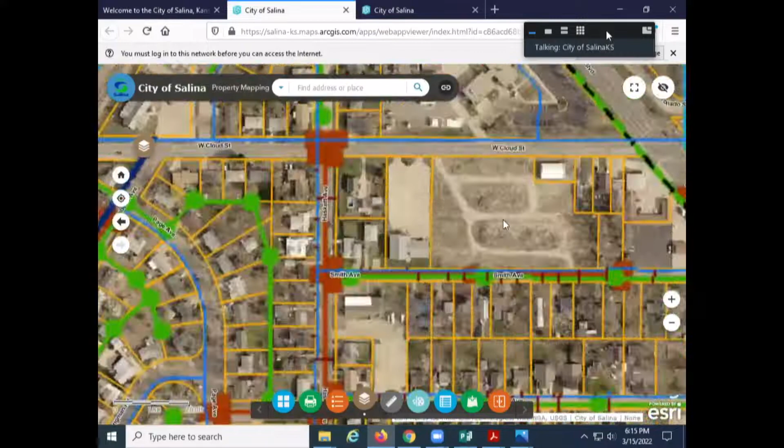Cloud carries 5,500 vehicles a day, and Mr. Mike Sell had commented on the trip generation rates for different types of uses. We've calculated this one from the Institute of Transportation Engineers at about 7.3 vehicles per day per dwelling unit, or about 351 trips that would be generated. We estimated that when the mobile home park was there, it generated between 160 and 280 vehicle trips per day, so you're looking at that incremental increase.

The opening on Smith is designed and intended primarily for emergency access, although it's fully available for vehicles to go in and out. With the signalized intersection at Cloud and Broadway, not many people are going to try to use Smith to access Broadway, but it would not be chained or gated - it would be a fully open driveway.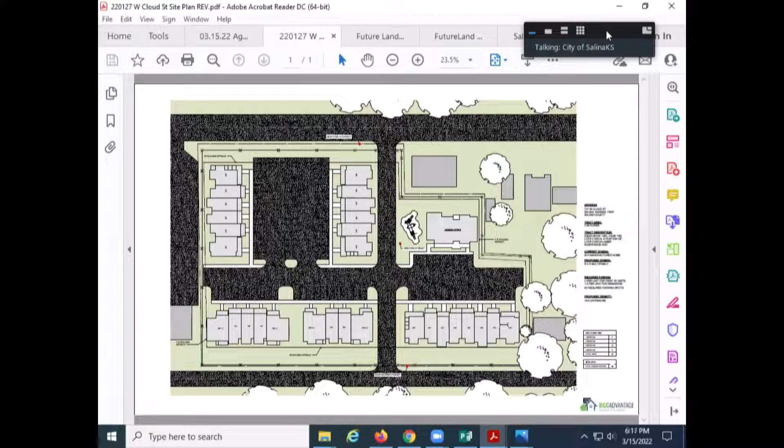So you have just recommended that this be changed to urban residential on the land use plan, and that would support R2.5 zoning and a density being proposed here of 18 units per acre. We think the location and development criteria are met from the comprehensive plan, and we've outlined some findings on page 8 of your report. The manufactured home park zoning is not desirable, and it inhibits redevelopment of this property, which we think is capable of supporting higher density.

Because of the nature and intensity of nearby uses and being at the edge of a neighborhood, we don't see this as adversely affecting the surrounding neighborhood or nearby properties. From what we can tell from our interaction with the neighbors, they don't view it as a negative. We have public utilities and services in place. We think the locational features are consistent with the locational preferences for multifamily housing, and there is an identified need for additional rental housing units in the community.

So option 1 is you could recommend approval of the applicant's request for R2.5 zoning as requested. You could recommend a lesser change to a lower density, which would not allow the 48 units. You could recommend that this be postponed to a future meeting date to allow additional information to be provided, or you could recommend denial of the request for R2.5 zoning. Our recommendation would be approval of the request based on staff's suggested findings.

We did want to point out that this site plan is for illustrative purposes. It's not something that the Planning Commission is voting on per se, but as Planning Commission members, you're certainly free to offer any comments or suggestions on the applicant's conceptual plan or to ask questions about it. So with that, staff would be open to any questions you have or to go back to any of the maps or graphics that we've displayed. Okay, anybody got any questions for staff on this?